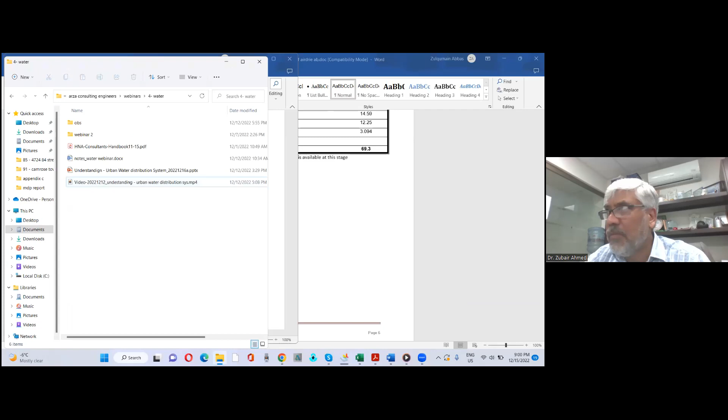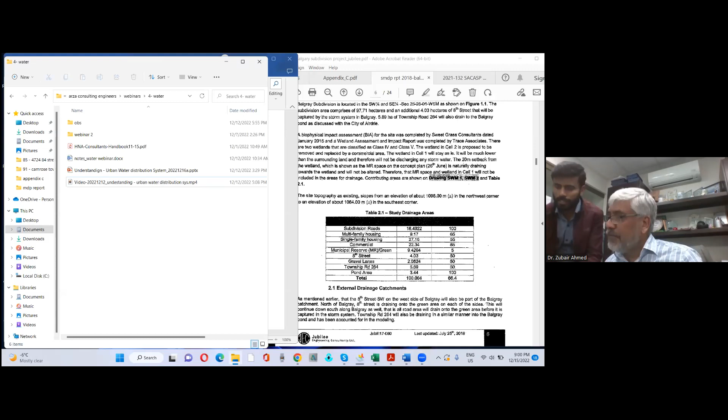Thank you. Sure. Can you see the screen, Dr. Saab?

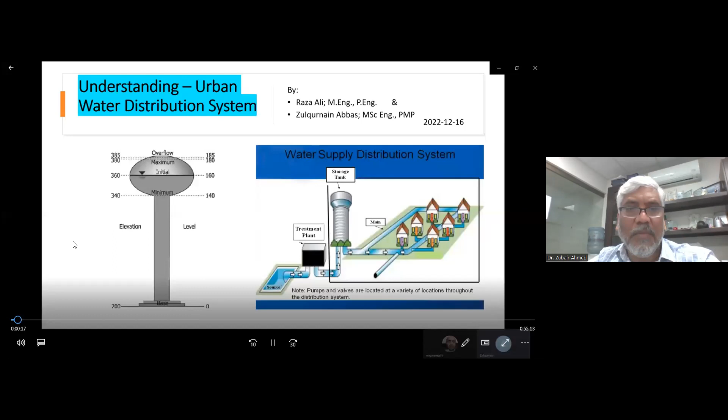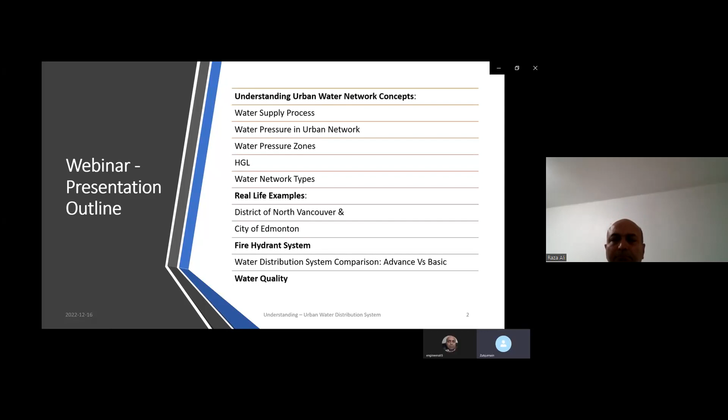Our presentation is on this topic today. The webinar presentation outline includes understanding urban water network concepts, including water supply process, water pressure in urban network, water pressure zones, how the zones are formed, hydraulic grade line, and water network types. Real life examples include two cities, a district of North Vancouver and city of Edmonton, with two presentations included. Then how the fire hydrant system works, and water distribution system comparison, covering how basic systems work and how advanced water distribution systems work. Finally, we have included a couple of slides on water quality.

My name is Raza Ali. I am a civil engineer, working as an engineer with the city of Toronto. I did my graduation from Mehran University and did my masters from NED and University of Waterloo. I have over 30 years of experience.

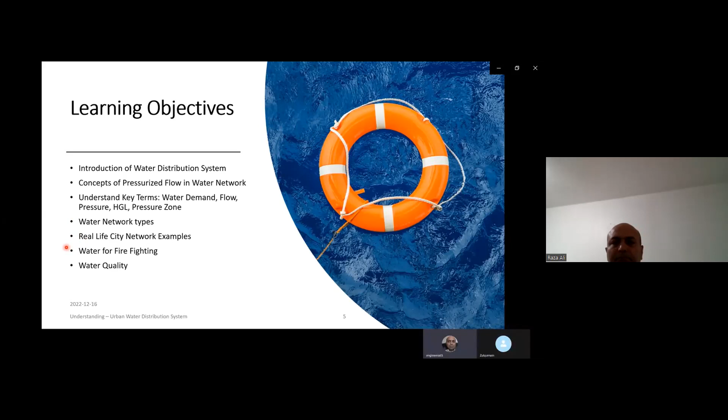Learning objective: for this presentation, our learning objective is introduction of water distribution system, concept of pressurized flow in water network, understanding of key terms like water demand, flow, pressure, HGL, pressure zone, and water network types. We have given some real life examples like city network examples, water for firefighting, and in the end we will be discussing water quality, along with understanding of urban water system and engineering concepts. This is the episode where we will discuss these terms and topics.

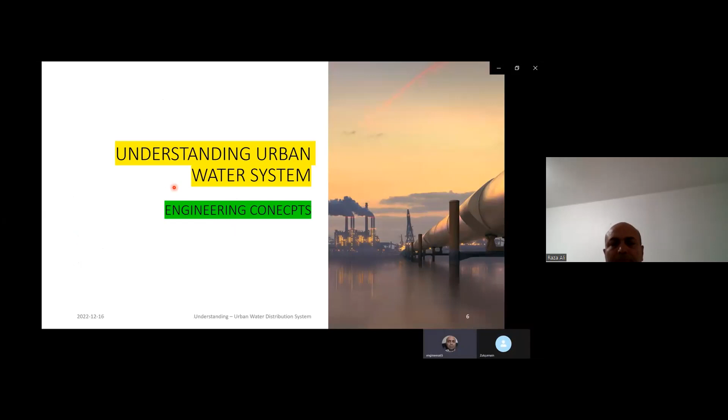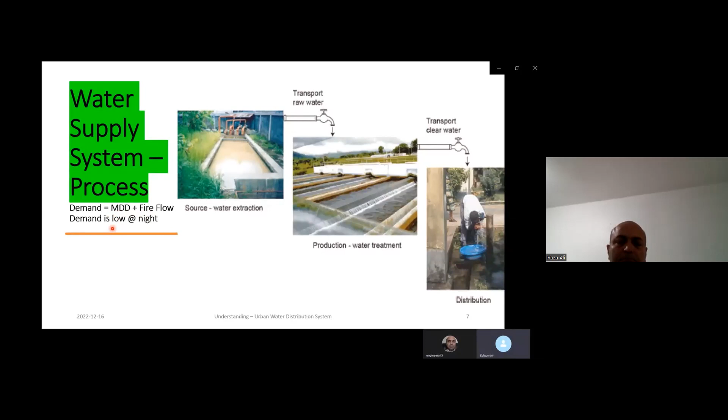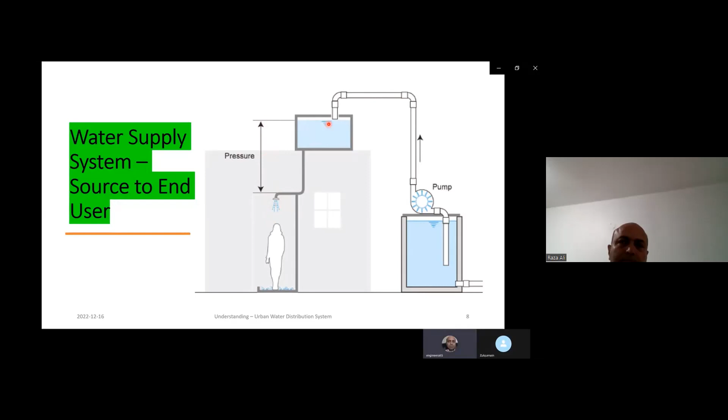And we know the demand of water is low at night as compared to the daytime. And here we are showing the water supply system from source to the end user. You can see there is a storage tank and there is a pump. Water is going from the pump to the overhead tank. And from the overhead tank, there is a user which is using a shower. And as we can see, there is a pressure from the shower head to the top of the tank, and with this pressure water is coming.

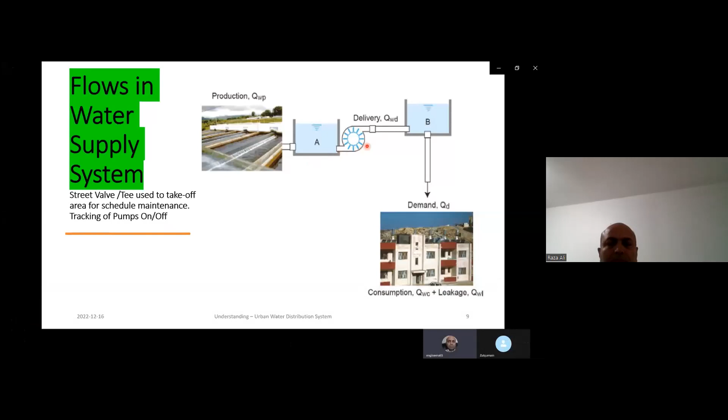And in this slide, we are talking about flows in water supply system. So there are some street valve T's used to take off an area for scheduled maintenance, and there is some tracking of pump on and off. From production, water is going through the pipes and the pumps and through reservoirs, reservoir A and reservoir B, and it's coming to the consumption, where we can see the water is coming, and there may be some leakage, unaccounted-for water.

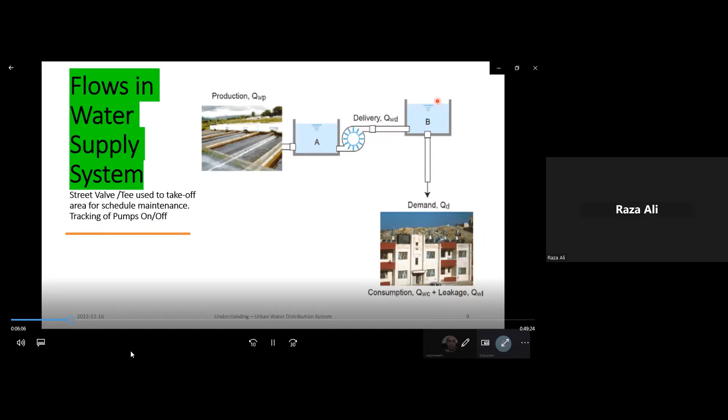Here I would like to add the street valves, which we call T's as well, are normally found in front of the houses, where we can shut down the supply to a single house, and even we can take off a whole community for scheduled maintenance of the pipe network. And also the pumps we are using here are automatically set on when the tank is at the low level, and they go off when the tank is full.

Here is the network configuration. So there are different networks available. One is the serial network, where a single line is running from the source, here in this case the water tank, and running through these nodes towards the community. Another is the branch network, where the water main is running and taking the water from the overhead tank, and then the laterals are supplying the individual users.

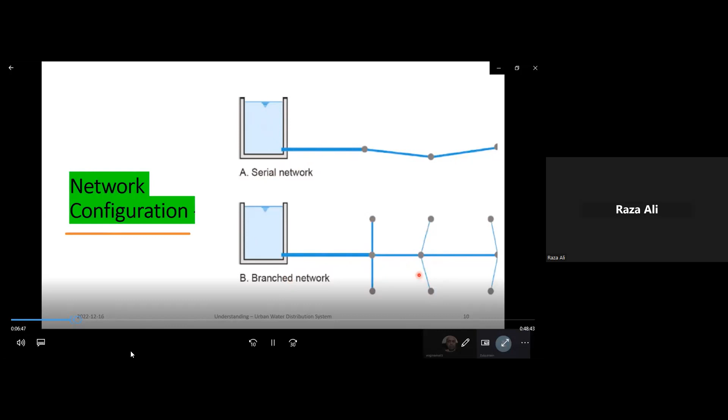The second typical network configuration is the looped network, where all the system is in the form of a loop. So all water is running through the network without any dead end in the pipe network, and this is one of the ways we keep the water fresh and healthy and running all the time.

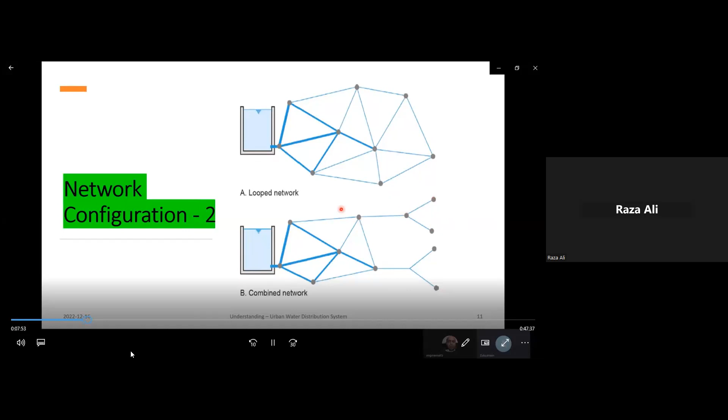And another is the combined network, where in one part the network of water mains is in a loop system, while in the second part we see the pipes are with dead ends. So sometimes where the water just comes to a dead end, there could be contamination or environmental issues, as the water is not running through the dead end as it does through the loop system.

So here I would like to give my audience the concept of pressure zones. As you can see, it starts from 2000 feet and goes to 2500 feet. So it's 5 pressure zones, each 100 feet apart. Usually we use an 80 feet to 130 feet elevation difference for making a pressure zone. So we can make it smaller or bigger, depending upon the situation.

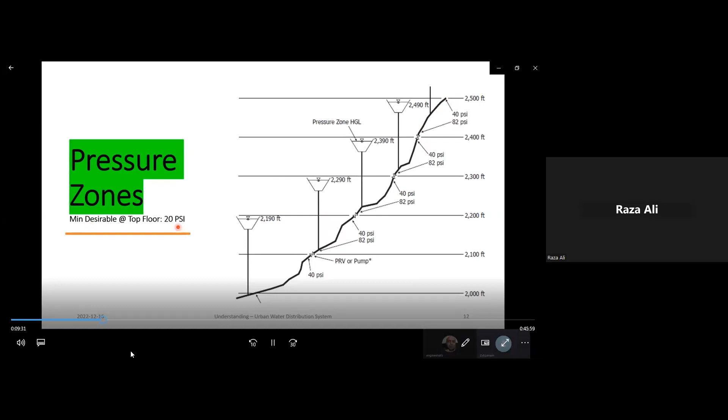But here we are taking a constant difference in elevation of 100 feet, and as you can see at the bottom, it's 40 psi pressure here, and we can use a PRV or pump, depending upon the flow direction. And in the second loop we can see 40 to 82 psi, similar pressure zones. It looks like equal pressure is distributed in each zone. And the minimum desirable pressure on the top floor here is 20 psi; the water pressure should not be less than 20 psi, otherwise it brings frustration for the users.

The next slide is regarding the hydraulic grade line. This is a very important concept in water distribution systems. So here we see in this water main the flow is running in this direction as shown by this arrow, and with this formula we can see the piezometric tube on top, and the water level, due to this pressure, reaches all the way to this level. And in this vertical pipe we see the water reaches all the way to this elevated tank.

So in case there are no users and the pump is running, water keeps on adding in this elevated tank, maybe at night time. And during the daytime, when the consumption is more and even with the pump running the consumption requirement is not being met through the pumping source only, then this additional volume of water comes into play and it starts depleting.

In the daytime during the peak hours they use it. So this is the level of the hydraulic grade line from the source where the water is being pumped, coming with more force, and as it goes down its head is dropping. So this is HGL. This is a very important concept in water distribution systems.

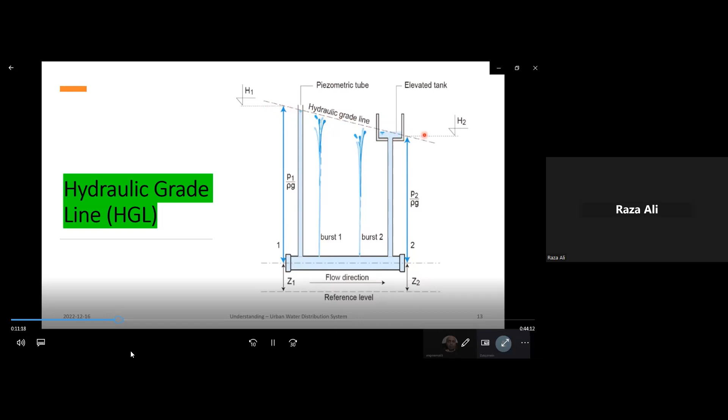Another example is here: this is an elevated water tank, and Z1 is shown as the elevation above the ground level or any reference level. Then this is the distribution system, and it runs down into the next elevated tank, but this is at a lower elevation compared to the first. So if we connect the tops of these water lines with the dotted line, this shows the hydraulic grade line.

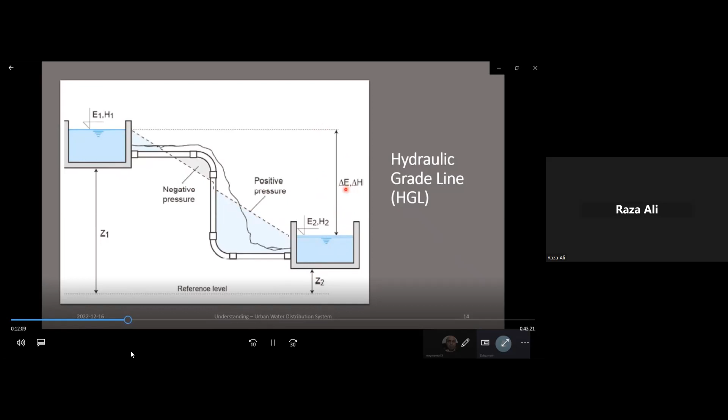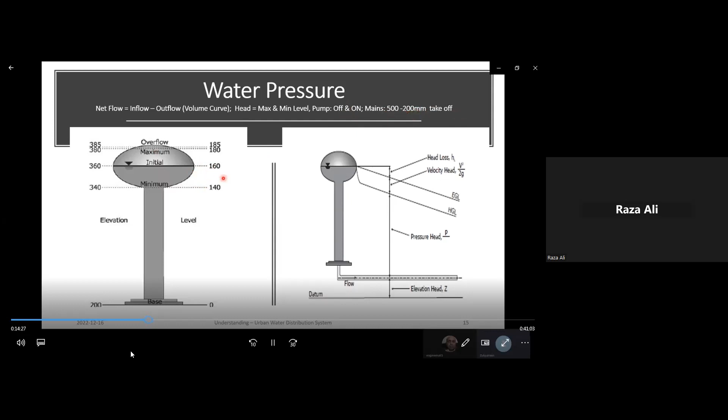Net flow in any water tank is calculated based on inflow minus outflow. This gives us the volume curve, how much volume is available in the water tank, and the head at maximum and minimum water level. The pump, as I discussed, triggers automatically on and off, so there's no need for manual operation for filling the tanks. Normally mains of 200 to 500 millimeter diameter are taking off from these water sources.

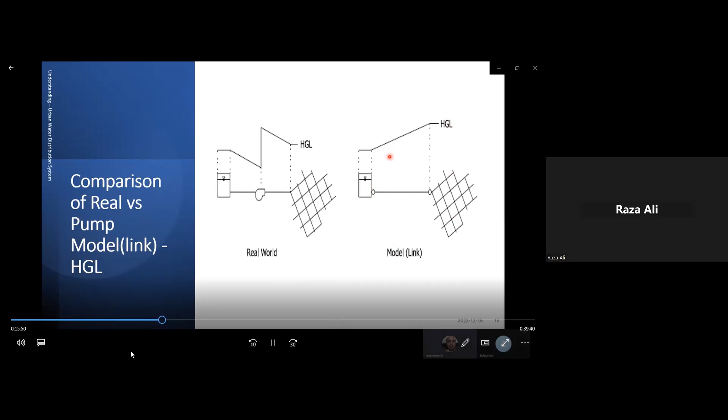On the model side, we are showing it with a link: same thing, reservoir, HGL, distribution system, but here you can see a steady rise in the HGL. Some software like EPANET shows the pump as a link. So this way we can show it in the model.

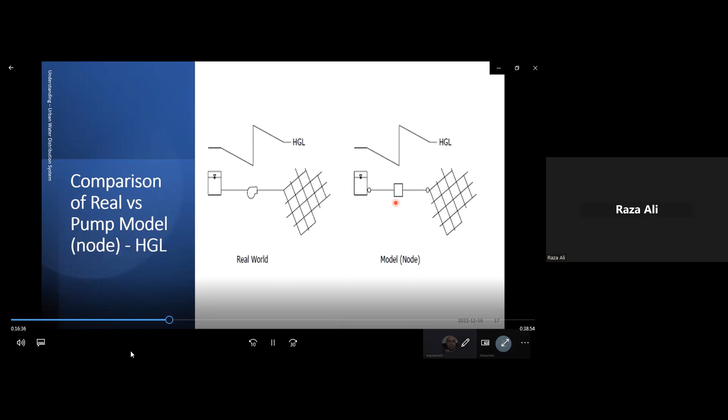Another way: in the real world, the same arrangement, and in the model we are representing a pump as a node, and as you can see the node is pushing the HGL like the pump. It's very similar. Software like WaterCAD and WaterGEMS uses the same analogy, and it's closer to the real system.

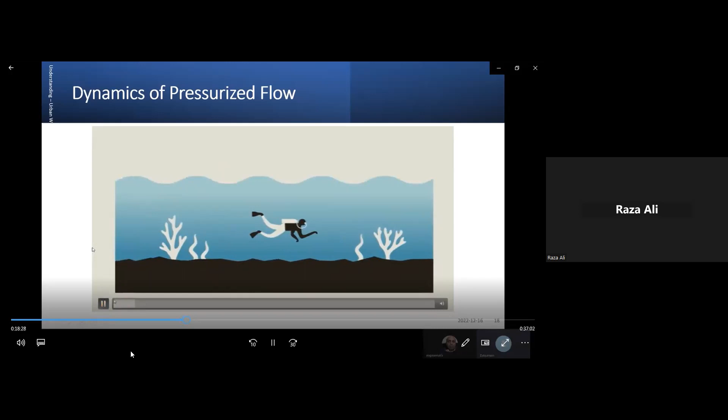Water is confined in a series of pipes. A distribution system has the same relation between depth and pressure. Imagine the water distribution system as a virtual ocean; we live inside it. It stopped, let me, yeah. So it gives an idea of the pressure available to the customers, to understand how to deliver water to the customers at the right pressure.

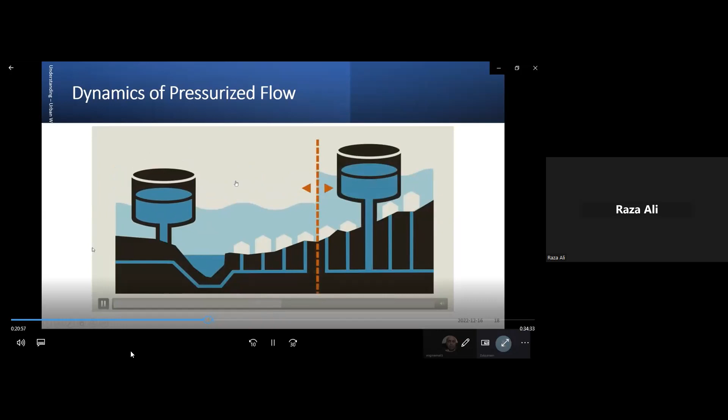So here are the valves. We see how these valves come under pressure when there's a lot of pressure, and here we see the low pressure. That's why it's wise to divide this city, as we see here. One tank is here and another tank is here. This is one pressure zone. This is another pressure zone.

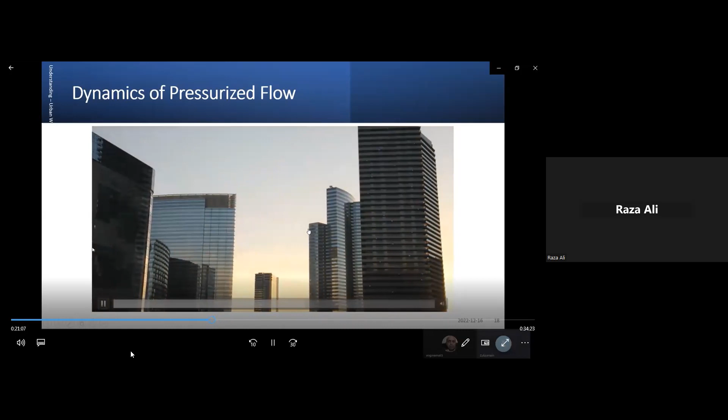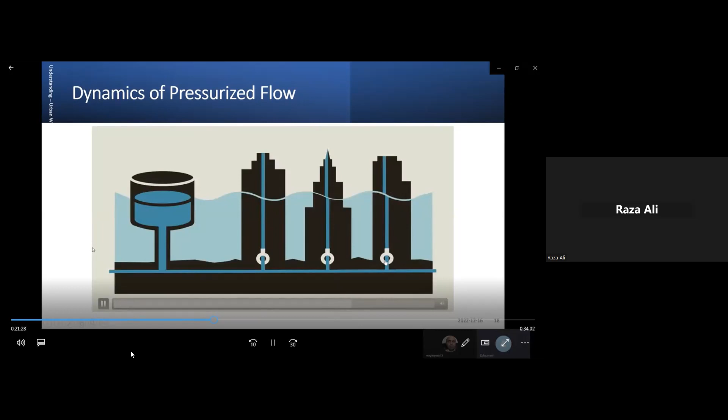And here we see the urban setup, and most of the high rise floors can be seen here. The virtual ocean stops here, but the top floor of the building is still higher. So the issue is how to raise the water all the way to the top. So here we see individual pumps below each building. Each building has its own pumps to pull the water up.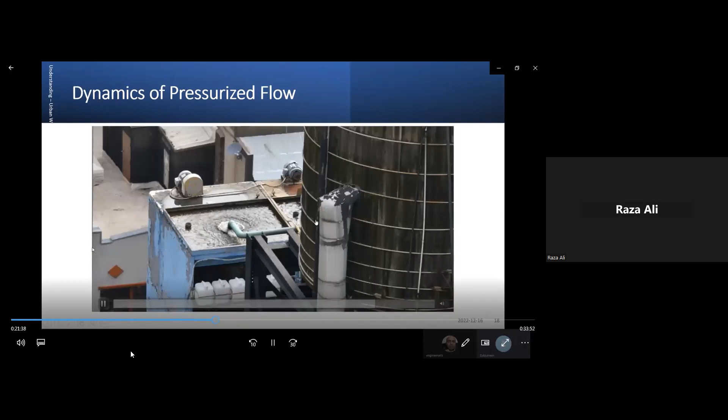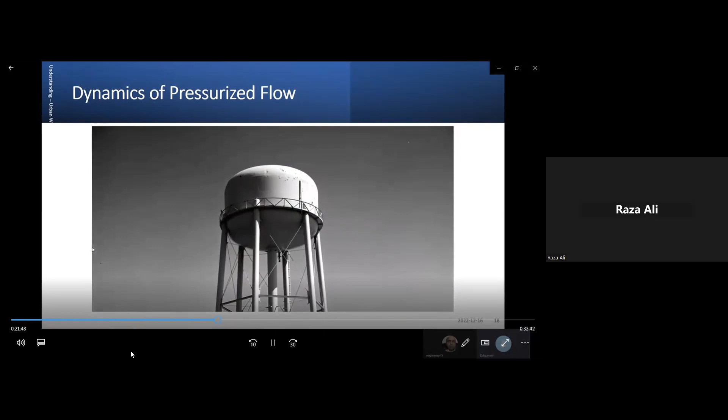On the top, the workers are working and we see these water tanks here, and the water is running through gravity. Water towers are cheap, as we see here. Water towers are for storage, and this is a cheap approach where the water runs under gravity. And these elevated storage tanks are definitely here to stay in the basic system of the Eastern world.

So in this slide, we will show some examples of water networks. Because I worked with the District of North Vancouver, I took examples from there. This is also, we can say, a case study for the urban area of British Columbia. So this is an aerial image of this area.

As you can see, on the north side there are some hilly areas, and on the south side there is a sea, and there are mountain areas at this location, and we are maintaining different pressure zones because of the difference in elevation. One pressure zone cannot meet the demand of all the customers of this area.

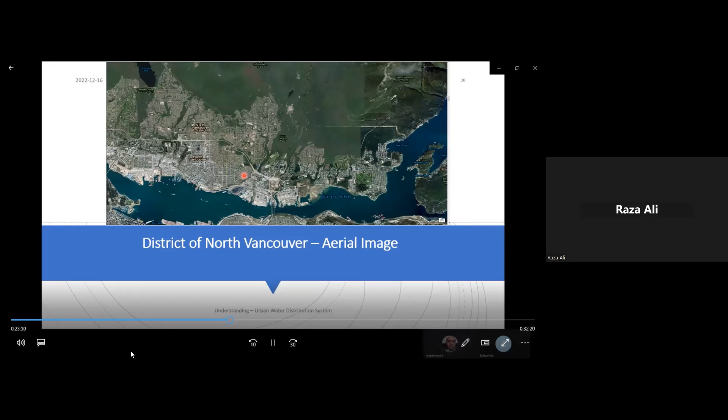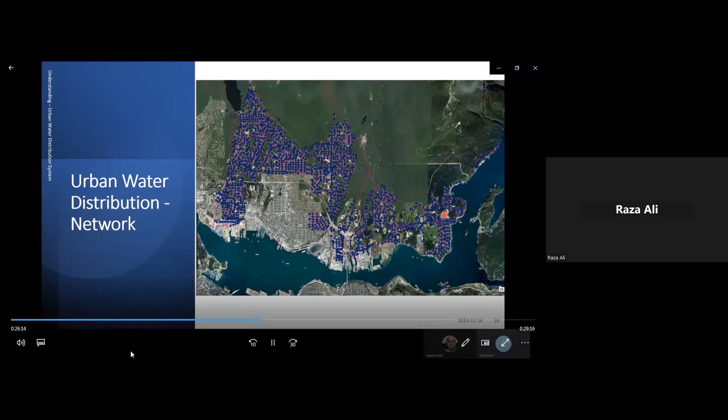And these are pressure zones. There are 26 pressure zones, and here I am showing some elevations. So you can see numbers in elevations, and there are different colors for different pressure zones. As we can see, on the north side we have hilly areas, so high elevation on the north side, and low elevation on the south side. On the south side there is the sea.

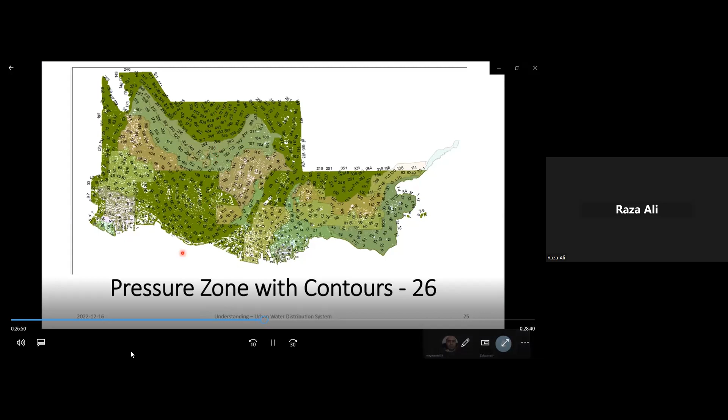So in this slide, I am showing a residential block, zoomed in. There are certain elements you can note down. For example, there are water lines, there are hydrants, there are service connections. This is an underground system, and it is being laid over the aerial photograph. So this is a typical subdivision of the district of North Vancouver.

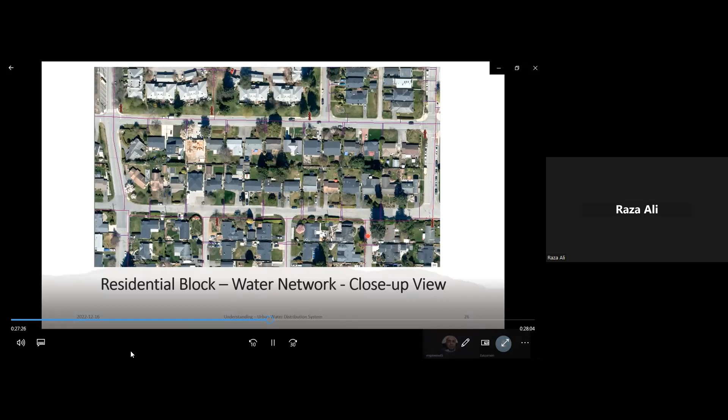As you can see, there are 26 pressure zones. So we have 7 pumping stations, and we have 35 pressure reducing stations. These help us to maintain the water pressure zones inside the district of North Vancouver.

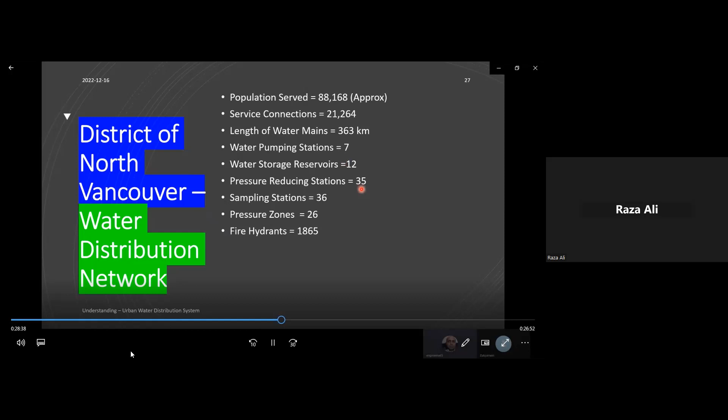The next example is the city of Edmonton, and we have tried to show a typical subdivision as was shown for the district of North Vancouver. This is in another province, Alberta, as the district of North Vancouver is in British Columbia. So how the typical network is running in the city of Edmonton. Here is the second example.

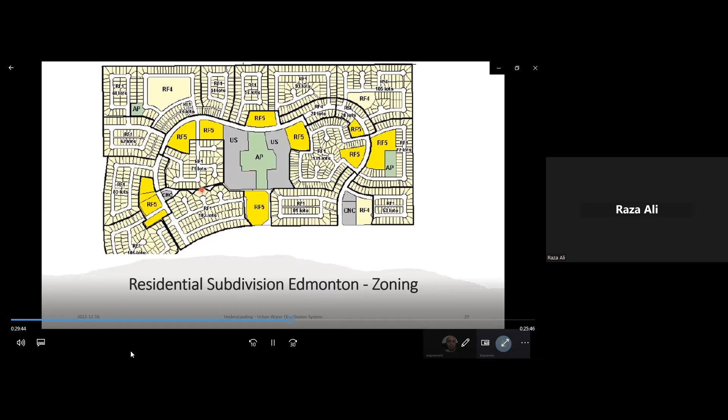This is a typical map of a residential subdivision, and this is the zoning map. With the different colors we can see these are the houses, individual houses, and the communities are built with green spaces, schools and commercial places within. So this is how the zoning is defined, like residential, small commercial setups, schools and everything. So this is how a typical plan of a residential subdivision is.

Here is the contour map of the pressure, how the water is running through this whole community. This is the same plan as we showed in the previous slide. So this is the red zone. It has less than 280 kilopascal, or we can also measure in PSI, pounds per square inch. So this is one zone where less than 280 kilopascal is maintained. Then this is the zone where the yellow is, 280 to 350 kPa, and this is where all the white is.

This is between 350 to 550 kilopascal. So high pressure is available in the pipe network. So customers may be happy, but here sometimes it becomes frustrating during the peak hours, when there's a lot of consumption, that users and consumers get less pressure here.

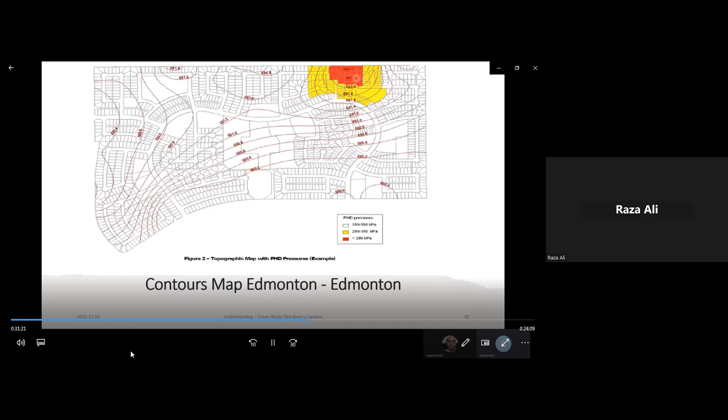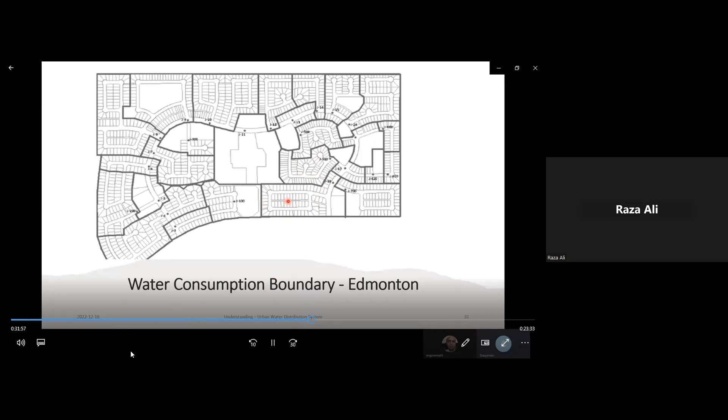This is the water consumption boundaries during the design. So all the individual phases, how they are developed over time. Their consumption is calculated, and then on the relevant node, the demand of that area is provided: how much demand is for this phase, how much is for this, and how much is for this. So water consumption boundaries are drawn, and the overall calculation for the water demand is made.

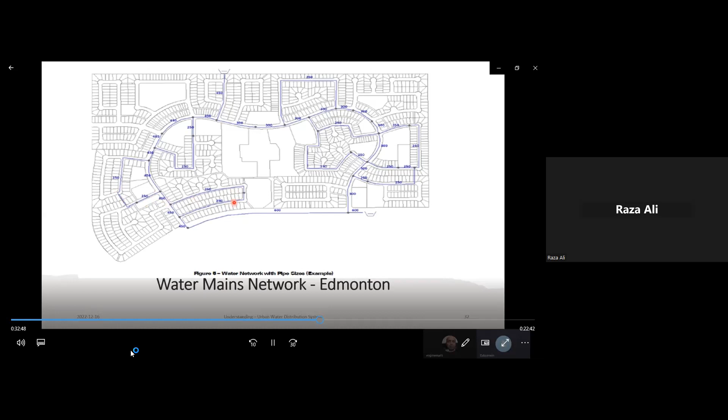Even here we can see the loop, and the end is here, because water is always draining down. This is the source. So we see in all this community, all the network is looped, and there is no dead end to this network.

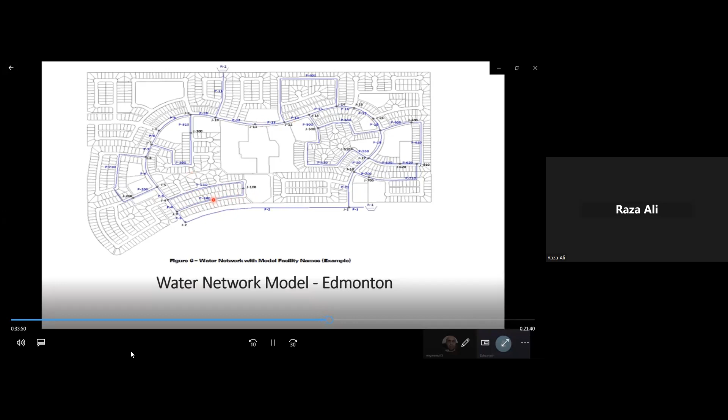Then we name each water main and the size of the water line; some are major lines and some are smaller lines. Then each individual house is provided with a connection, and normally the connection here is 25 millimeter. The smallest connection to every single house is a 1-inch pipe connected to each individual residence.

Here we are introducing the fire hydrant network. For the Pakistani students this might be something new, that fire hydrants are present here and they are used for firefighting. And one of the purposes of the water distribution system is to get water for firefighting.

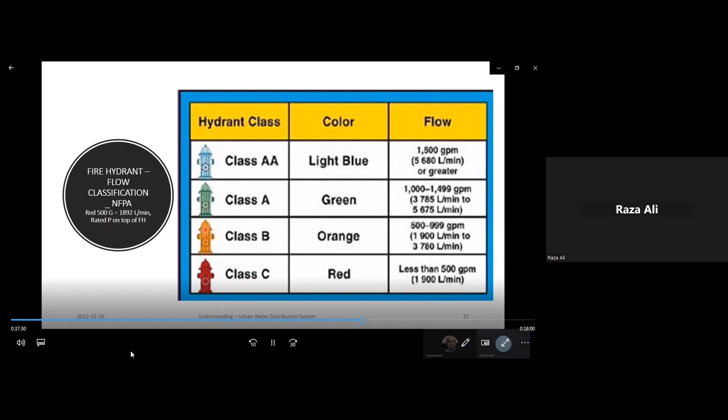One more interesting thing is on every single fire hydrant, on top of it, if we look closely, we can see the rated pressure engraved on top, showing what pressure is running through that typical hydrant.

Normally the demand for industrial and commercial fire hydrants is set, according to the District of North Vancouver guidelines, at 260 liters per second, at 50 psi.

Pipe rating, as discussed previously, when there's a lot of pressure and the network is under high stress, we need very good quality pipe network systems. Normally the material used is rated for up to 150 psi, so the pipe system can sustain that pressure.

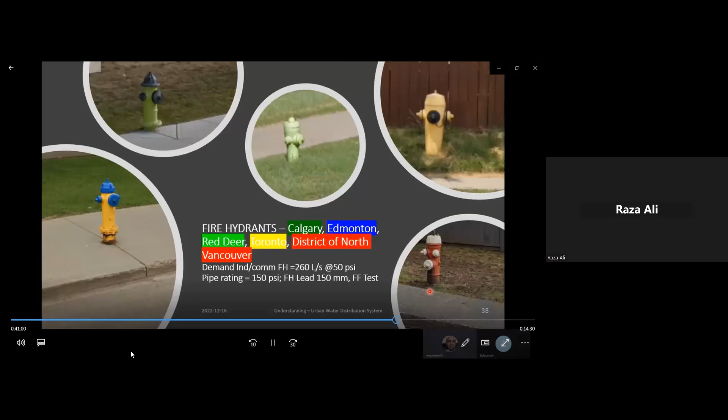These connections are also called fire department connections, or FDC. Normally we see these close to the front of an industrial, commercial, or high-rise building.

How it works is, when the fire truck comes in case of emergency and there's a fire in the building, the pumper truck hooks up with this nozzle, and a fire hydrant is also close by, within 100 feet, to supplement flow volume for firefighting, because the regular water flow may be less than the volume required. So the pumper truck connects to this and boosts it to the next level of pressure so firefighters can successfully control the fire.

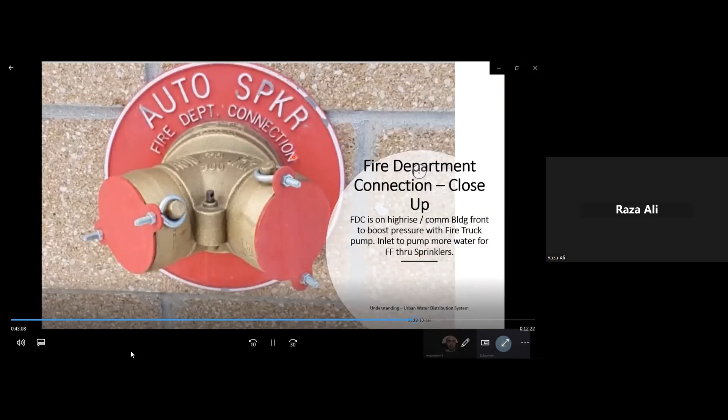A fire truck pump is mounted on the fire truck, which pressurizes the flow through this connection, and it may be used through the existing sprinkler system to control the fire. This is the inlet to the pipe to pump more water for firefighting through the sprinklers. So these inlets are where the pumper truck connects and pumps more water while simultaneously connected to a nearby fire hydrant to take control over the fire.

So here we are presenting a comparison between two systems, because we have experience of back home, the Pakistani system, where we were raised, and then we moved to Canada and now have experience of the Canadian system. So we are in a good position to present the difference between these two systems. In the next slide, I am showing the comparison between Canadian and Pakistani water distribution systems. I will go first with the Canadian system.

It's managed by municipalities or designated organizations. For example, District of North Vancouver takes water from Metro Vancouver and distributes it through the municipality itself.

The Pakistani water distribution system is managed by the Public Health Department. In Sindh, it's managed by the Public Health Department. For rural areas or some cities, like Karachi or Hyderabad, they have separate water boards.

In the Canadian water system, we take water from a surface source, and in Pakistan we can take water from an underground source, or in Karachi from some lakes like this one.

The Canadian water distribution system is gravity based, pressurized, or hybrid. It depends upon the situation, about the contours of the area, whether it will be fed by gravity, pressurized, or hybrid.

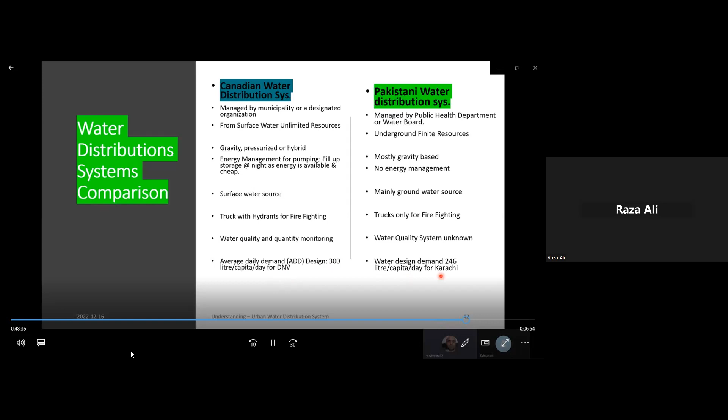Here I am showing some comparison between the two systems, with a satellite image of Mirpurkhas, where I was raised, which I took from the internet. And there is another picture from Quebec, showing a water storage reservoir.

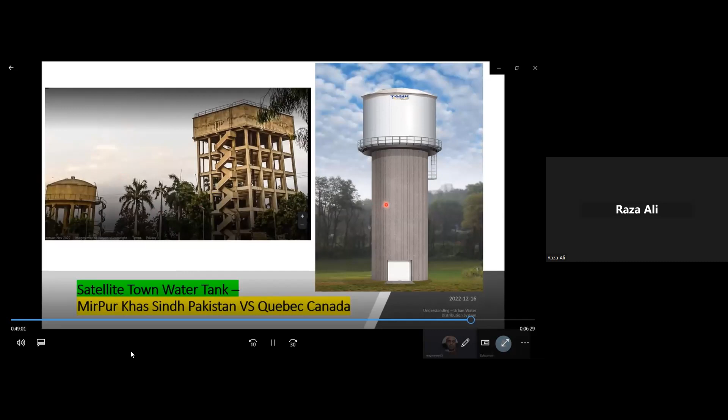I would like to show water quality for the District of North Vancouver example, with water quality modeling for this water network.

For this water quality modeling in the urban network, we see the water has invariably the same quality level running throughout the network system. So if we open the tap in the kitchen or the washroom, water is coming from the same source. Water for domestic use has quality guidelines which are applicable invariably across the system.

Water for commercial use and mass needs, for example, a lot of water is used in bulk quantity for construction sites, so they get special permission from the city or municipality and could draw from the local fire hydrant, and also sometimes for farming when they need water, they can get it there as well. For commercial use like construction, this is non-potable water, not drinking water.

It is not good for drinking. Normally trucks are available for 5,000, 10,000 to 20,000 gallons for any commercial activity, construction site, or road construction where compaction needs to be achieved and the soil needs to be wet. Normally the order is placed and water is directly taken from a source other than municipality water, because municipal water is treated water, whereas this is raw, non-potable water. So the trucks deliver the water.

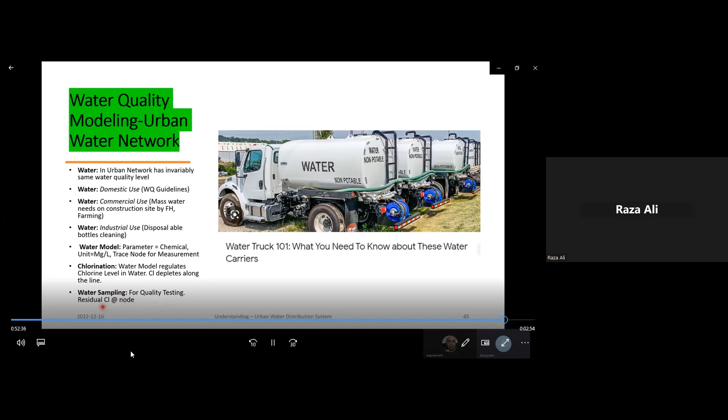Here I am showing water quality guidelines which the District of North Vancouver follows, and this is good for British Columbia. We can see the maximum allowable concentration of E. coli is non-detectable per 100 ml.

E. coli indicates the source of human excreta in the water system. So we take a sample of 100 ml and check whether there is E. coli or not. Total coliform should also be non-detectable in 100 ml.

Heterotrophic plate count operational guideline is 500 CFU per ml, turbidity 5 NTU, chlorine 0.04 to 2 mg per liter, temperature aesthetic objective 15 degrees centigrade, and pH 7 to 10.5.

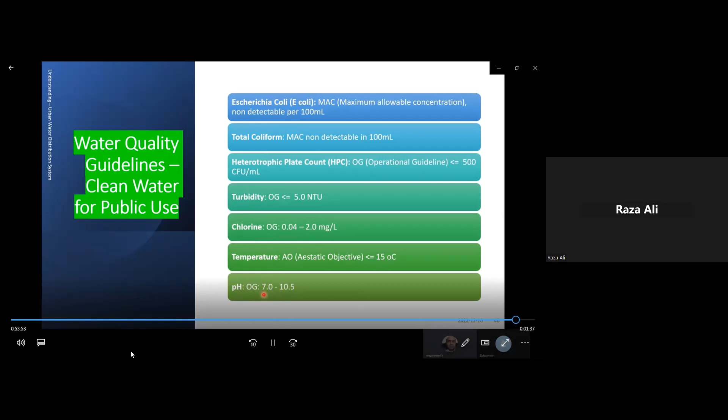Here we arrive at the end of today's session, and we welcome your questions and answers.

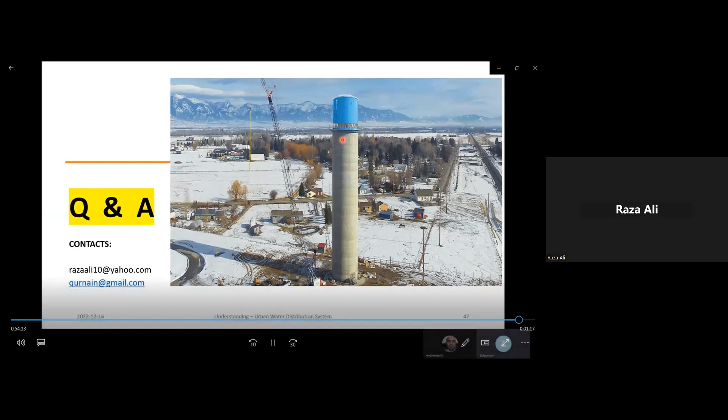Here is a typical beautiful tower where water is being distributed for a rural community. This is a typical example of water distribution in a rural setup, showing how the water reservoir on top is used to serve this entire rural community.

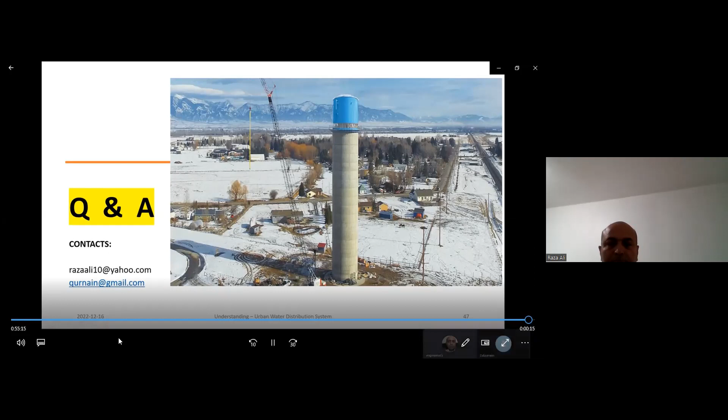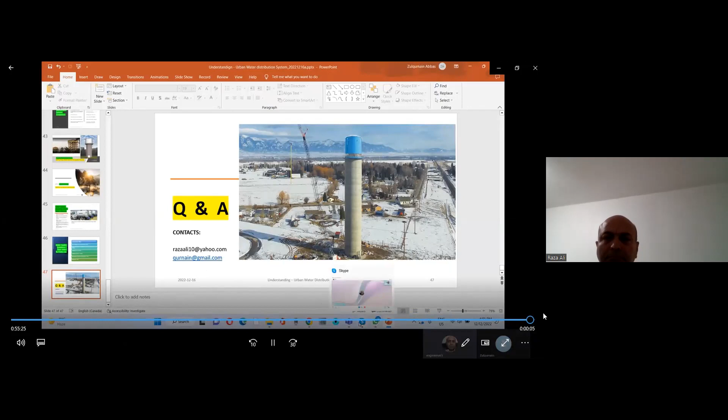Thank you very much for your time and this very excellent, informative presentation we have got today. I would like to ask my students if they have any questions.